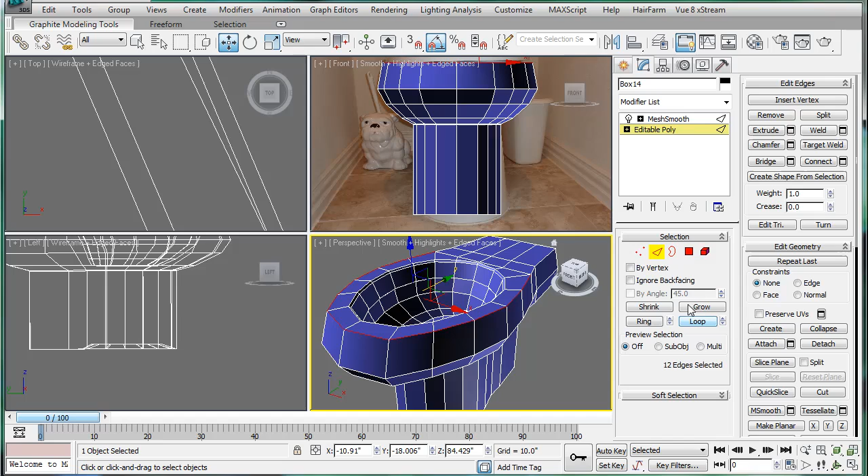This edge to be a bit sharper. And we're going to do the same with this edge right here. Going all the way around. Chamfer. Okay, just double check this mesh smooth. So we should have generally sharp edges, and we do.

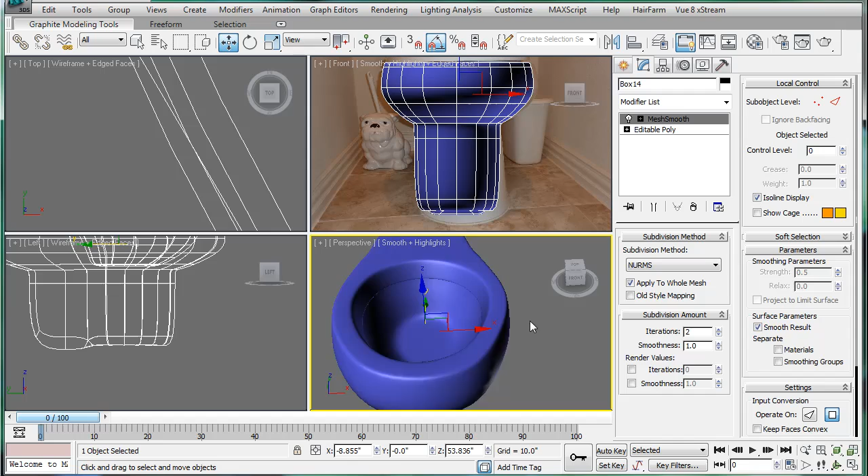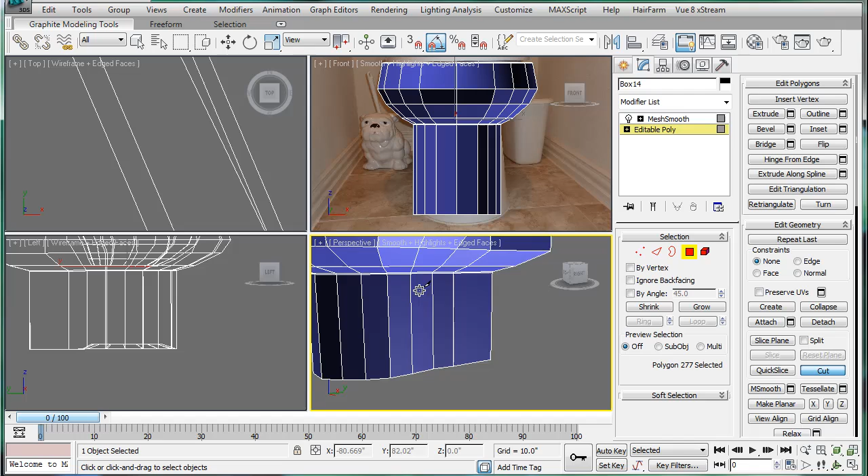Alright. Let's start digging in here. We have to... what do we have to do? Somehow make an indent. So, using cut, I guess. Can't see another way of doing it. Just start kind of cutting shaped like this. And bring it up to the corner. And I can already see this is going to fail me miserably, so I'd save your scenes before you do this.

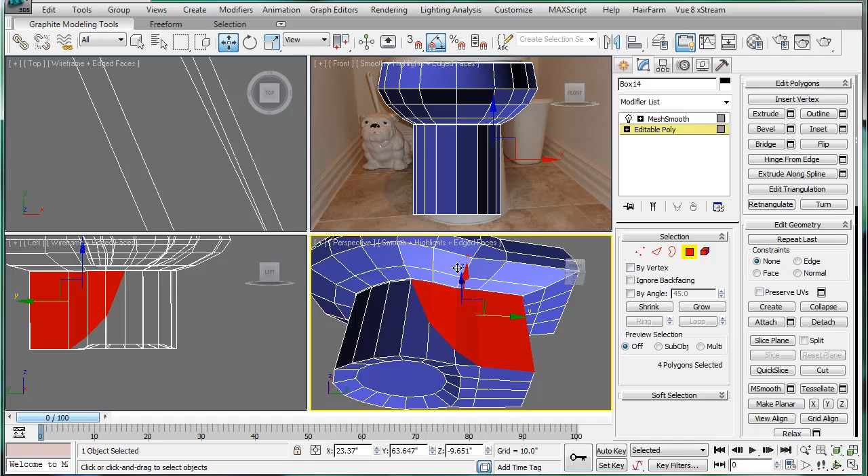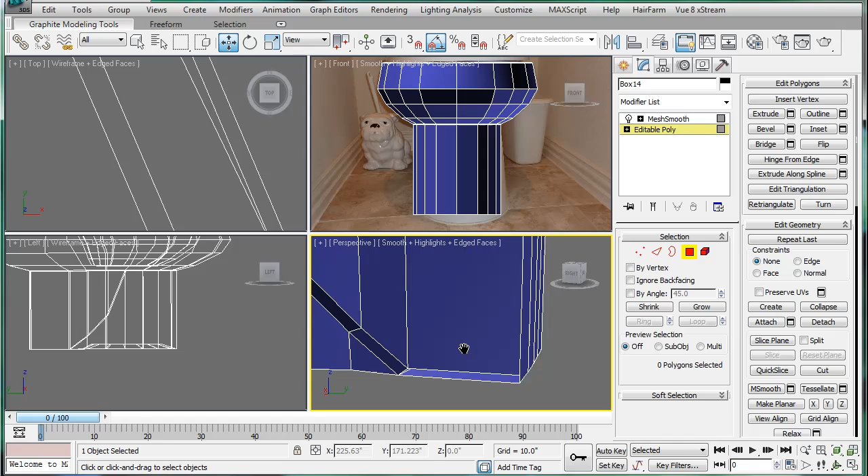Let's see. Yeah, just extrude backwards. Okay. Then we're going to want to delete this polygon here. Delete. And vertex. Target weld. Let's see what we have. Target weld that. Delete. Now let's go to vertex. Target weld. That to that. And then that to that.

Select this line and bring it back out a bit. And finally, I want to just delete this face right here. And that face. And then target weld those. Okay. That should give us a somewhat interesting shape, if I'm not mistaken. Which resembles a curve, which is what we need.

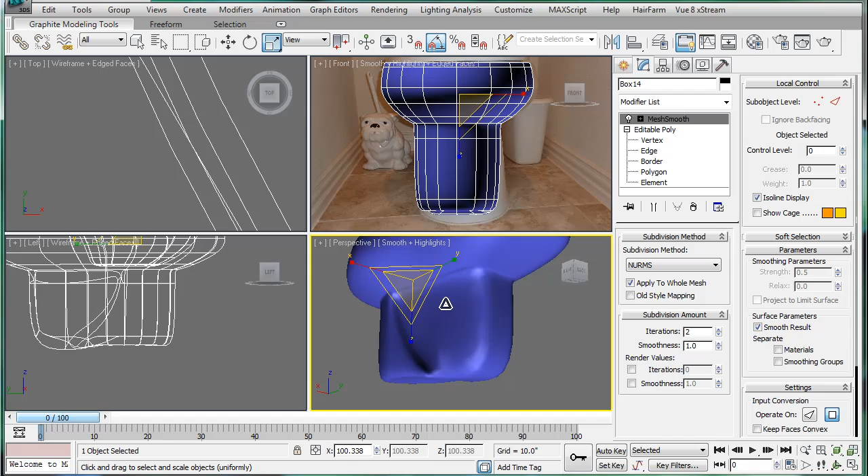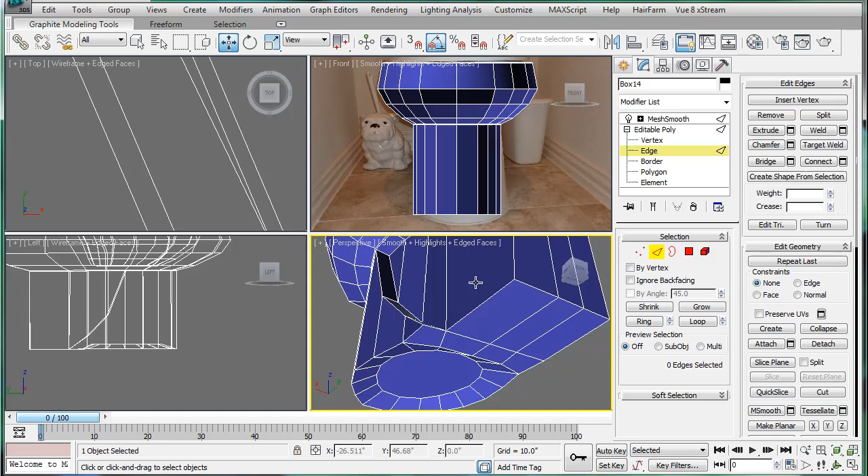Alright, next let's select this edge here, shift drag it out, which doesn't work. So let's just cheat. Extrude these out a bit. This is all going to be the floor anyway. And hey, toilets have stuff below the floors, if I recall correctly. Bring this out to the same level. Okay. And bring it in just a bit.

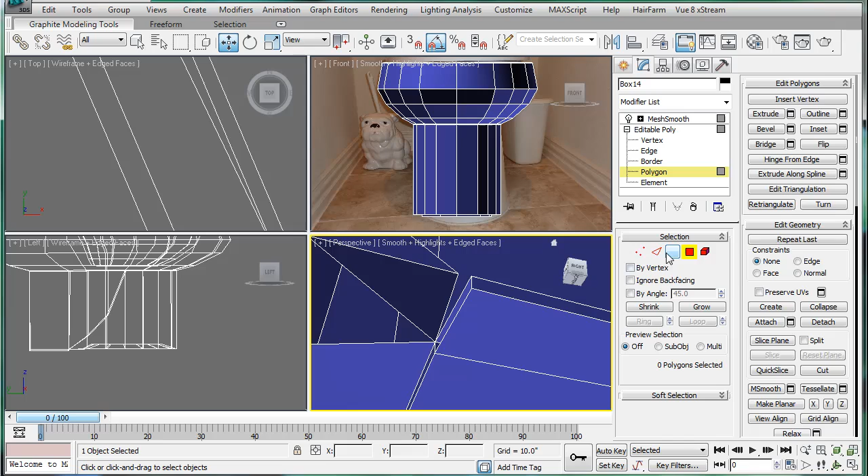Finally, we're going to delete that face. I'm pretty sure this target weld isn't going to work, but I can try anyway. Yep. And delete this face. Now it might work. It does. And then we're going to just manually rebuild those two polys. And somehow we're going to have to magically recreate this on the other side. I haven't quite figured out how yet.

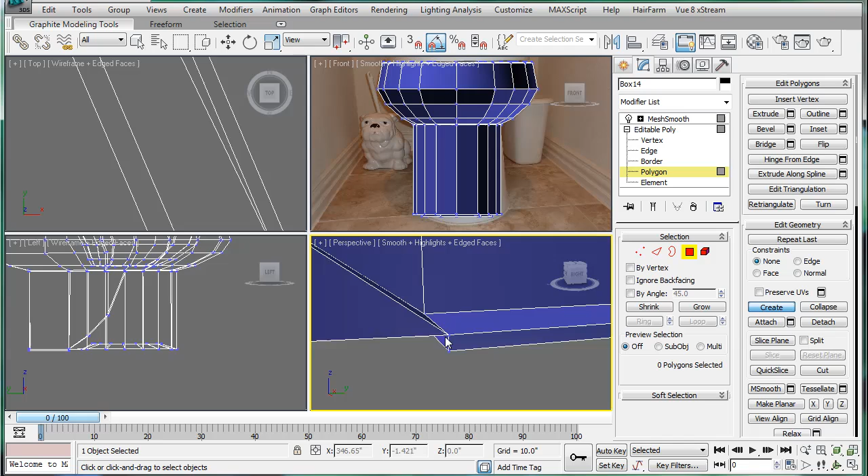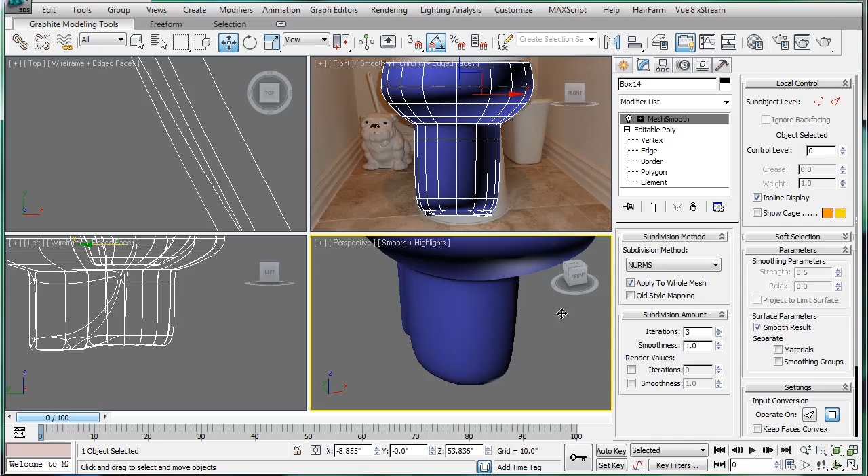Delete the face, great. Let's see what mesh smooth does if we don't have a face there. Doesn't like it, but it doesn't hate it either. And we still have what we wanted, which is that face. You know what, I think we can live with that, seeing as how it's actually behind the toilet anyway.

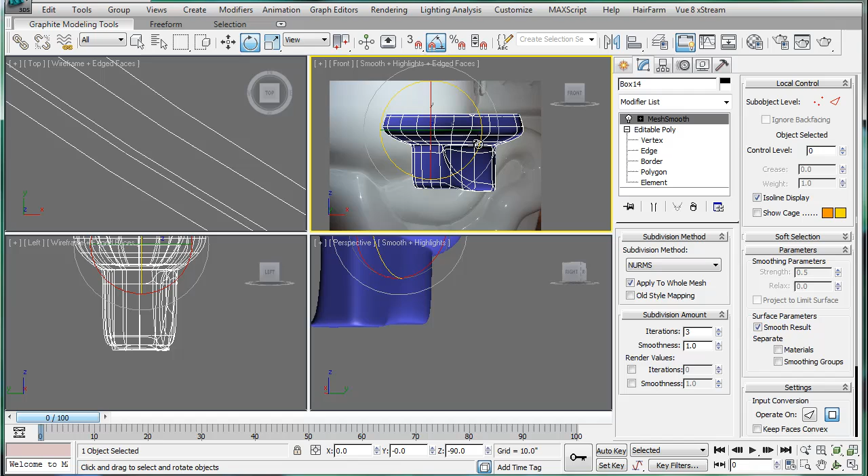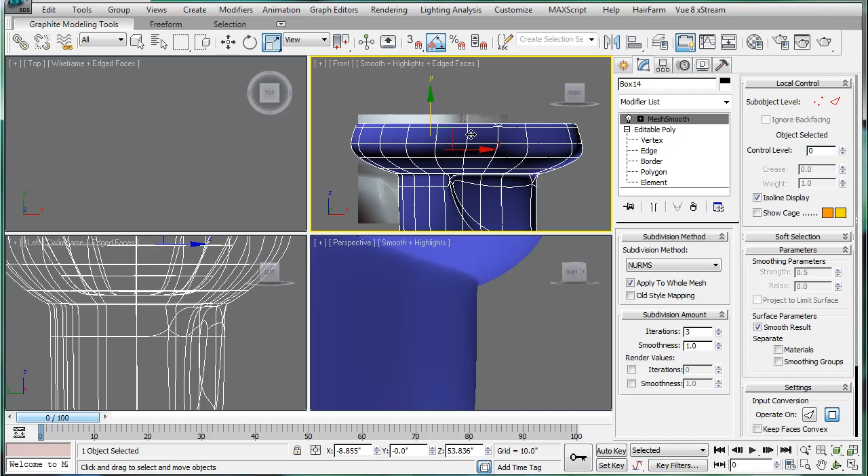And then let's go here, Alt-B, Files. Let's just select one of these side images here. We're not going to follow it exactly because it's, well, there'd be no point. And just scale this up until the bowl is the approximate right size. Take something out here. So we'll just kind of double check. Just get matched up there.

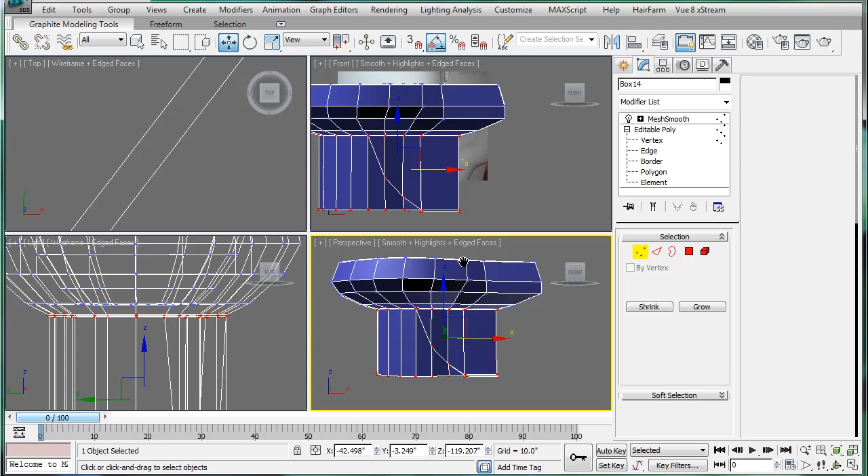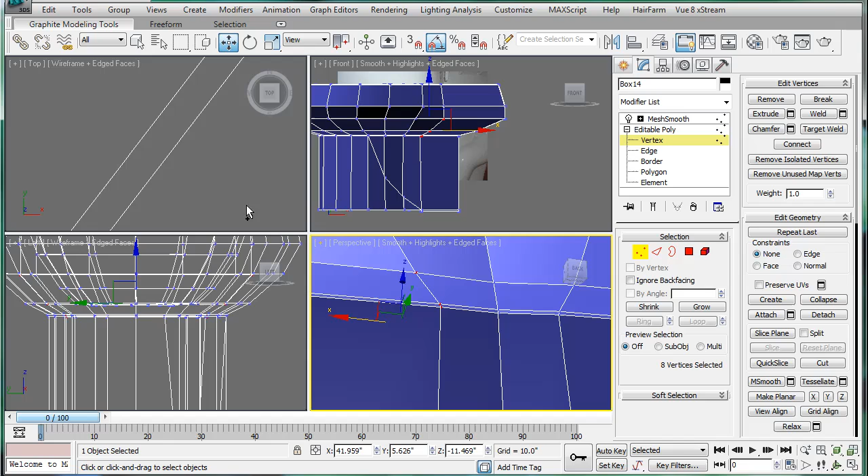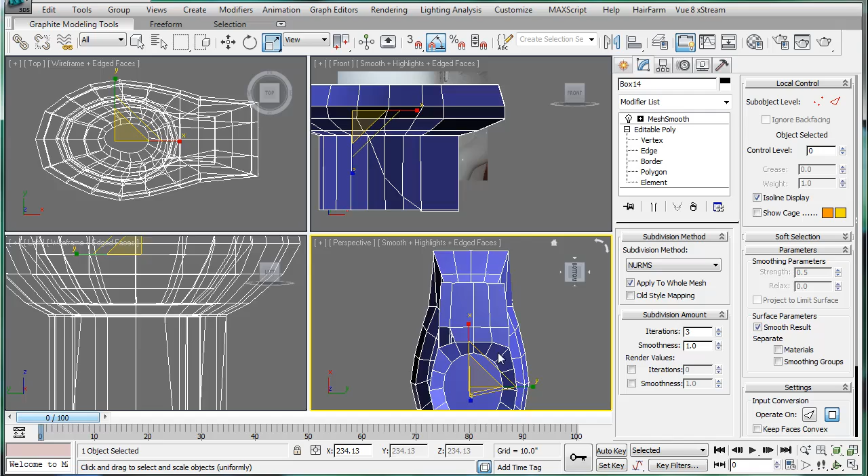Yeah, so let's go into perspective. Select some verts, and we want to select these two in specific, along with these two. And do the same on this side. To make sure in the top view that you have the same ones, and we do. And just scale them in. Actually scale that up just a bit. We don't want it to touch there yet. Alright.

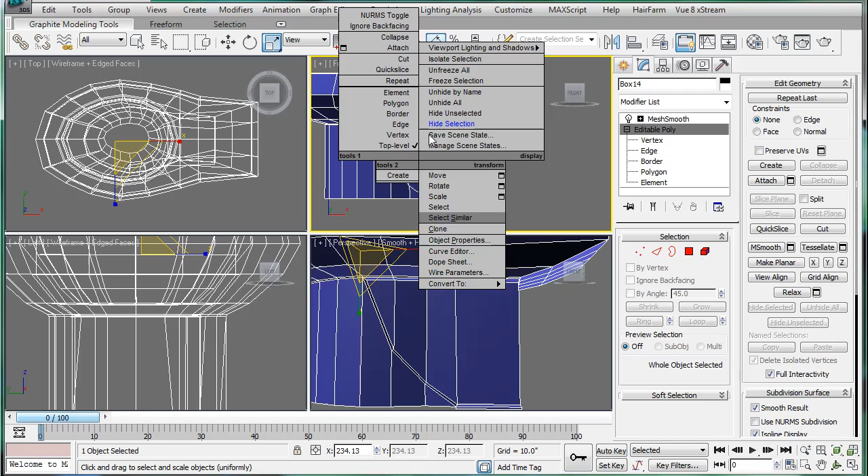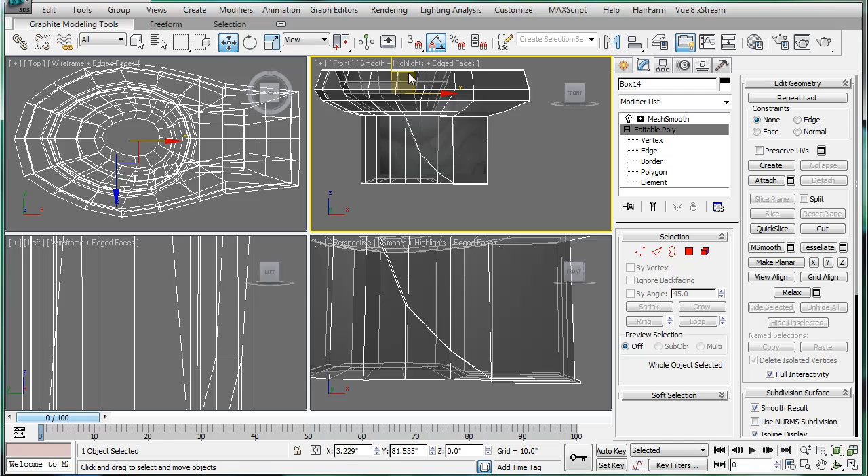And let's just build in some weird little blob shapes. So, editable poly, cut, and let's actually see if we can get this thing to be transparent. For some reason, it's always by layer, but shouldn't be a problem. Just scale this up. Just kind of position it like this. And let's start using the cut command.

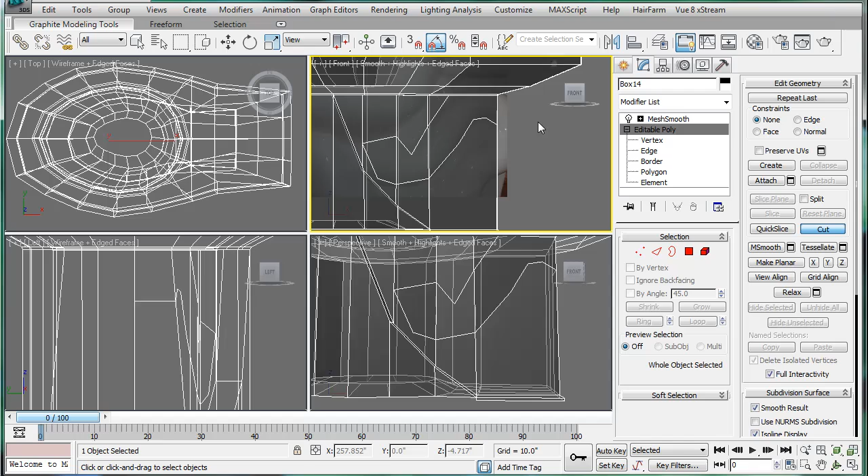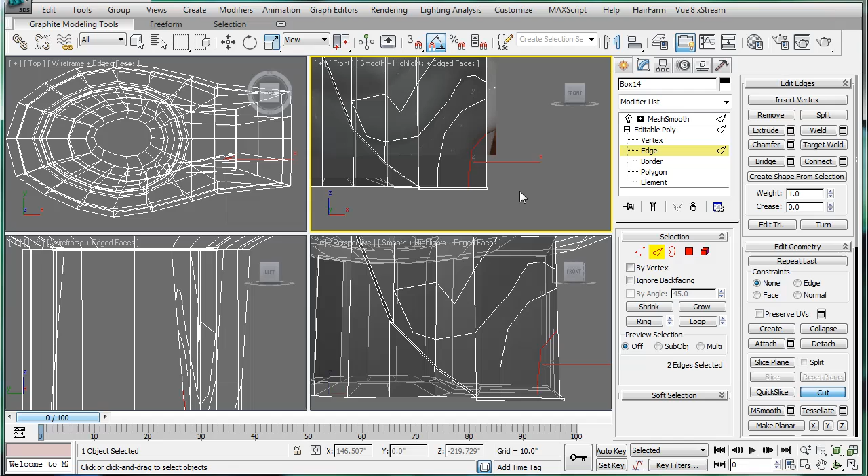So, cut this way. Down and up. And let's start on the other side. This is just freeform cutting. Although we occasionally have that problem. It's not all that big of one. Cut. And alright. Let's get out of see-through. See-through, by the way, is Alt-X.

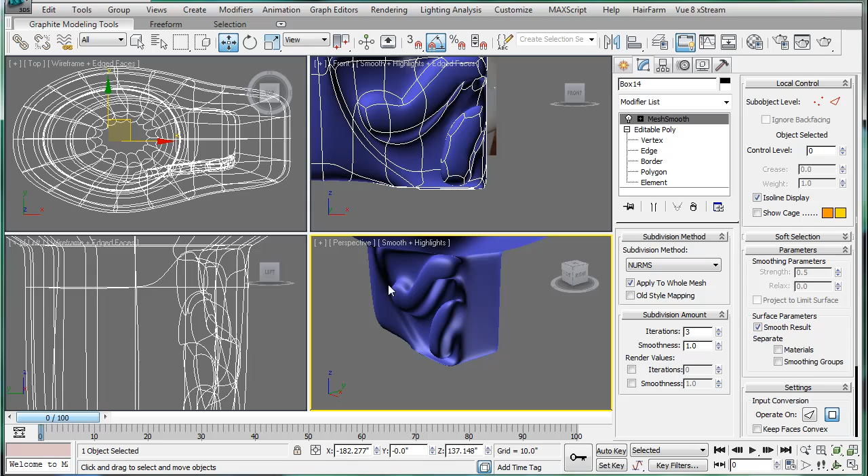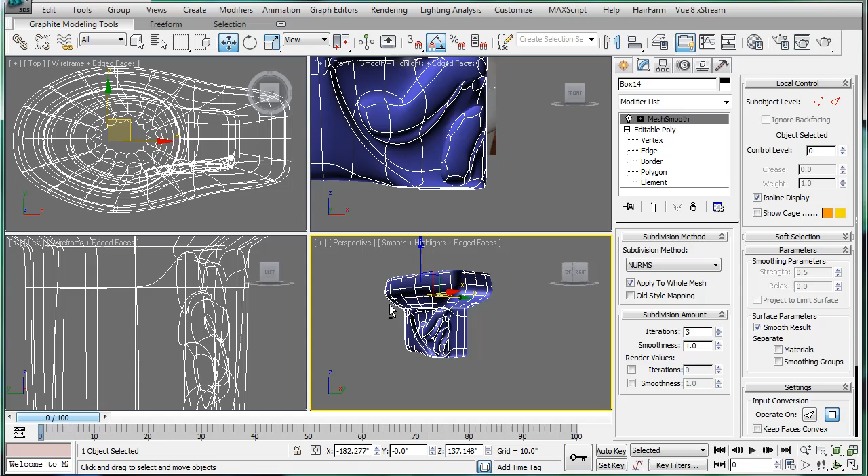Let's select these, extrude. Extrude them, and let's see what the mesh smooth does to them. Wouldn't you believe it? Kind of decent-y looking pipe things. Seen from the side, you might not even know they're different. But what we need to do is blend them in a bit. So select these, bring it down, and then bring this down just a tad as well. So it blends into the actual thing.

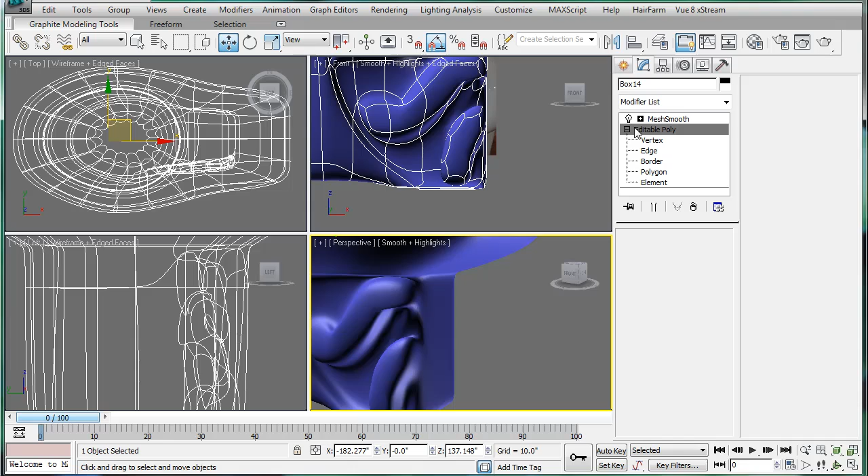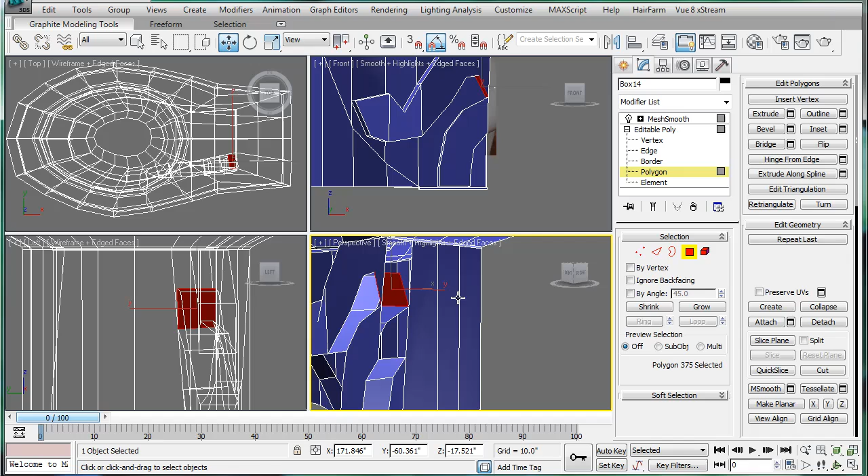Alright, I'm impressed with myself. That'd be a bit difficult. And you can make them wrap around the back if you want, but yeah, there's no real reason to. What actually we'll do though is delete, and vertex, target weld, and just target weld the two together. I'll do that next part.